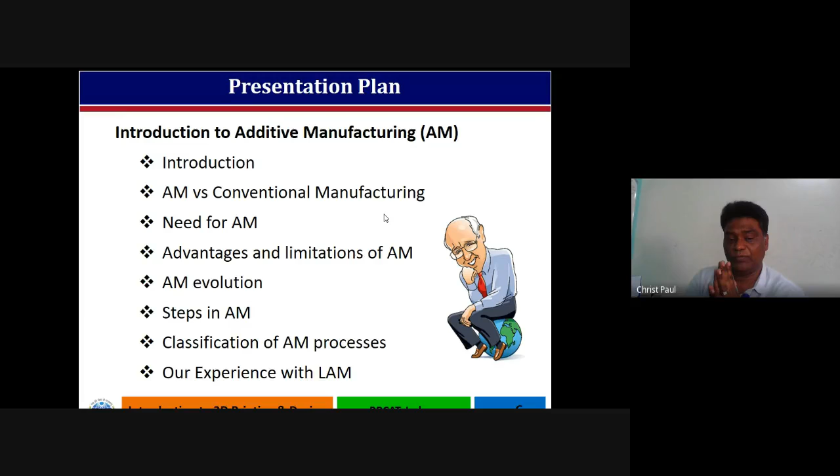So let me come to the presentation plan. We'll start with the introduction. We'll be talking of additive manufacturing and conventional manufacturing comparison. Then why do we need it, what are the advantages and limitations, how AM evolved, what are the steps. We'll talk about the classification, and finally I'll come to our experience in laser additive manufacturing.

Whatever content I'm talking today is part of these 3 books. One is Laser in Manufacturing by Professor J. Paulo Davim. Another is Additive Manufacturing Applications and Innovations, edited by Rupinder Singh and J. Paulo Davim. And the third book we are working on is already in the press, likely to be released in April 2021. Its name is Additive Manufacturing Principles, Technologies and Applications. Whatever the AICTE syllabus is in additive manufacturing, everything will be covered in the textbook that we are writing.

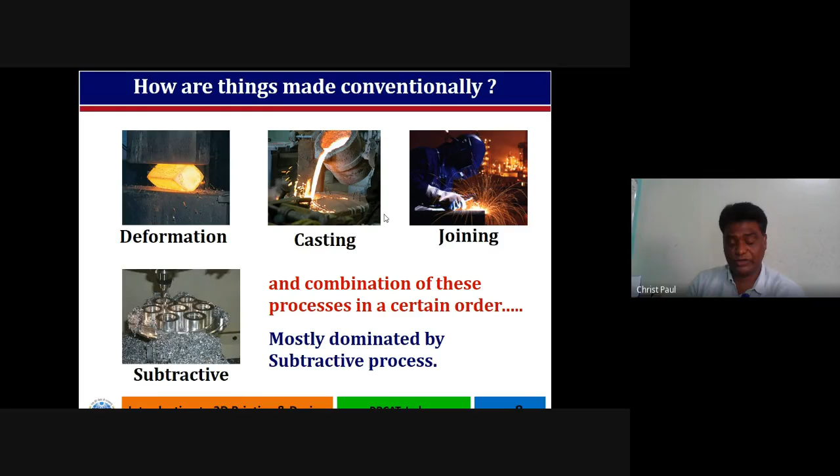So let me start. You all know that conventionally the materials are made by subtractive process. The processes contributing to this are deformation, casting, joining. What happened in 1987? People thought of changing this sign from minus to plus. This change in the sign made a shop floor job into a designer job in an air-conditioned room. This brought a lot of revolutions and changed the very thought of doing the job in the industry.

There is one full-fledged standard called ISO ASTM 52900. This defines the process of joining materials to make parts from 3D model data layer by layer, as opposed to subtractive manufacturing and formative manufacturing technology. If you see this definition, there are 5 criteria that qualify any process to be called additive manufacturing. Number 1, it should be a process of joining of material. You cannot just do a subtractive operation if you are talking of additive manufacturing.

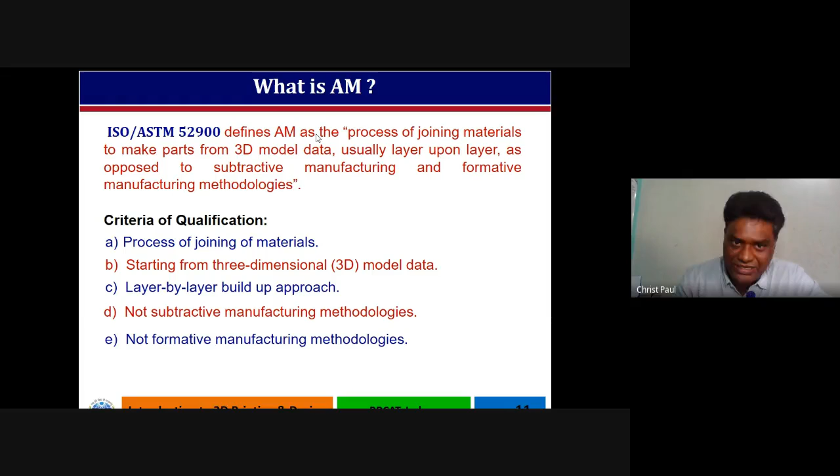Second, it should always start from a 3D model, so that you then build upon it. Third, it should be layer by layer build up. You cannot have something just starting from somewhere and finishing without doing a layer by layer operation. That is also compulsory. Then fourth, it should not be a subtractive methodology, and it should not be a formative methodology. These are the 5 criteria as per this definition.

There are so many processes. In this big chart I have put down which processes qualify and why others don't. N means they are not qualifying all these points, only limited points. Let me explain with one or two examples. Take centrifugal casting. It can make you a pipe of any diameter, and by changing the centrifuge speed you can have variable thickness. But can we have any shape other than cylindrical? No. So this process gets disqualified.

Similarly, if we talk of forging, it is not subtractive, so it's qualifying there, but does it start with the joining of the material? No, forging doesn't do it. Does it start with the 3D model data? No, it doesn't.

Is it a layer by layer process? It doesn't. And is it not a formative process? No. So what is happening, you see, we have to put all the 5 criteria for any process to be called additive manufacturing. And if it is not doing, it may look very close.

For example, now take conventional welding. I'm not talking of 3D welding, I'm talking of conventional welding. So in conventional welding, we are joining the material. Yes, we are joining. Are we starting with the 3D model? No, we are not starting with the 3D model. We are just taking the torch and starting building. Is it layer by layer? No, we are joining two plates.

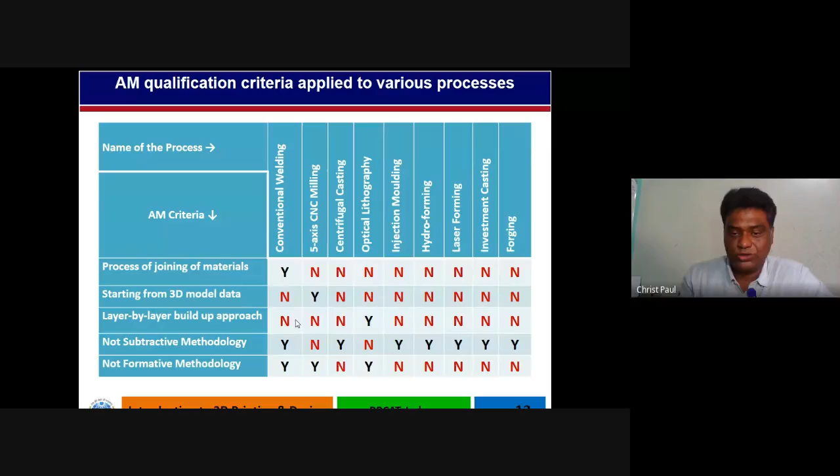So it's not. Is it a subtractive process? It is not a subtractive method. Is it not a formative? Yes, it is not. But again, these 2 criteria, it fails. So these are the points which need to be considered whenever we are talking of any process to be qualified as additive manufacturing.

There are many names to this process. You see, all goes to AM. Maybe 3D printing, rapid prototyping, additive fabrication. So many names. So I'm not going to detail this. In fact, AM is not a new concept. It existed since long. You see, a seed grows into the plant. Similarly, a small infant grows to the adult.

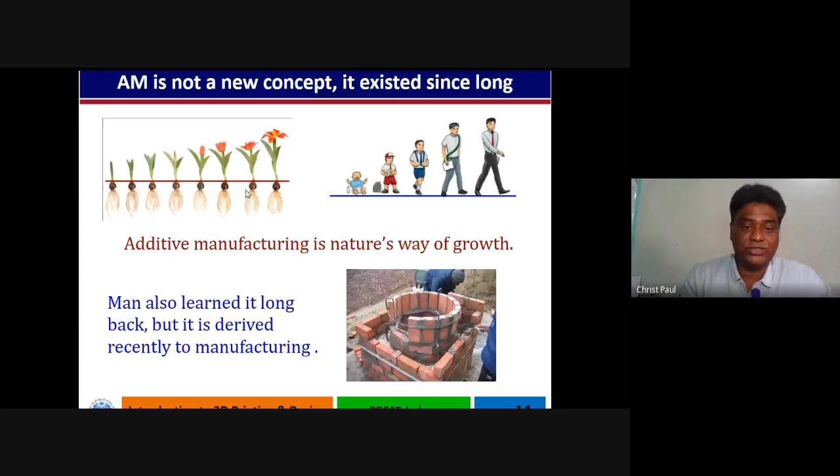In everything you see, they are taking something in. Things are not being removed. It's not like they are a big bulk and then it's cut and given the shape. No, it's additive. So what I want to say is additive is a more natural way of growth. It's nature's way of growth. Similarly, people try to do something in this direction.

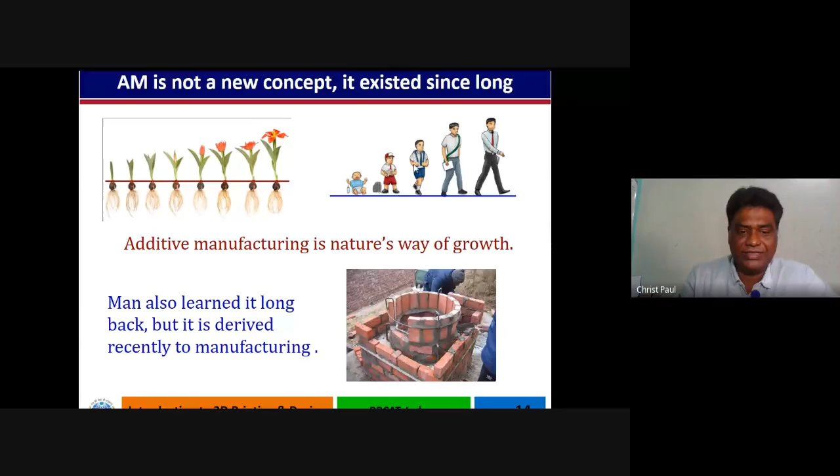If you construct a house, you can take some shapeless things and just keep on growing layer by layer. So it is very close to it, but still it is not additive. Now, the major problem is why people didn't do it earlier: we never had that much resources. We didn't have control on the process to start in this way. Today, as the technology grew up, some of the things have come up and things are changing now.

This is a quick comparison of additive, subtractive, and formative. For example, in terms of dimensional accuracy, additive was low to medium, subtractive very good dimensional accuracy, formative medium. So if you want to have very good precision and dimensional accuracy in your job, then additive is not the solution as of today. If we talk of surface finish, you can see here also it is disadvantageous.

But if you talk of complex geometry, for example, you want to make a very complex geometry, then AM is one of the very good potential solutions. And subtractive has got limitations, because if it is a 3-axis machine, you know the limitation of 3-axis. If it is 5-axis, you can do something, but still there are issues. And formative, definitely a medium sort of scale you can give for it.

In terms of green technology, AM has got reduced material wastage, subtractive has got high material wastage, and formative is there, but not to that level. So this is a quick comparison of these processes under different heads. You can have these ideas and go ahead.

Now, if you talk of the cost per part, in additive manufacturing the cost is not going down as the number of parts grows. So whenever it comes to customization, to limited production, additive is going to be very good, because the cost per part will be less. But when you need thousands and hundreds of thousands, then subtractive and formative are going to lead the way, and that is what is being practiced globally.

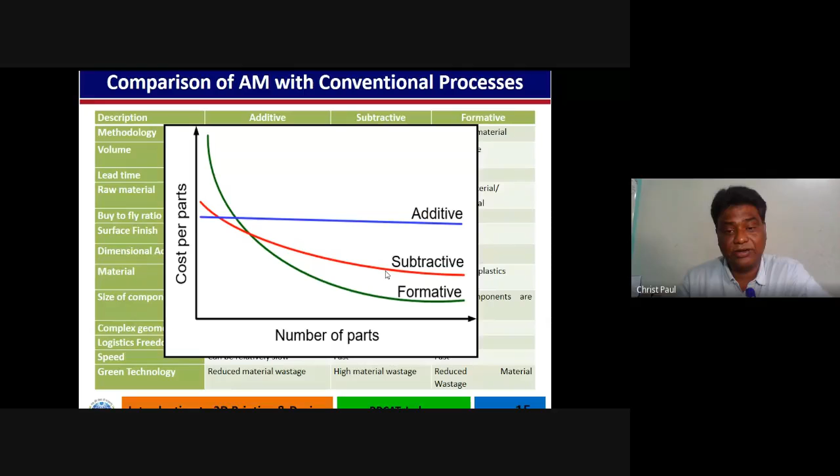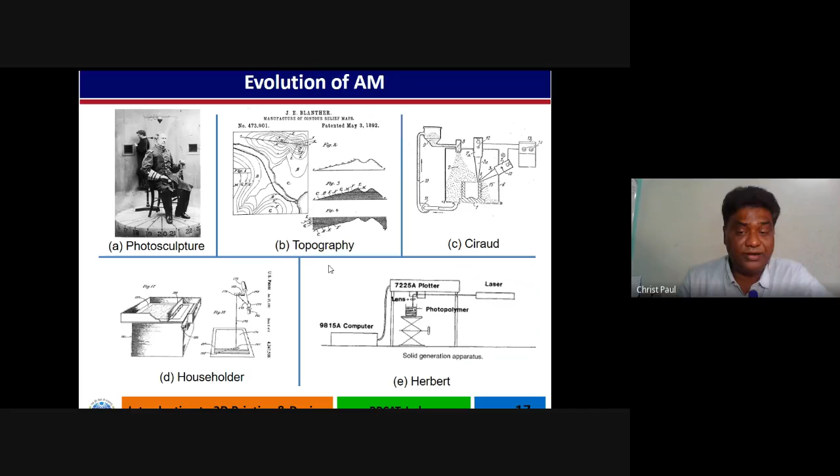So what they did is they did some measurement, and after that they made a layer by layer things so that people know where is the hill, where is the cavity, where is the die, what is the taper and all. So some small scale down model topography they did. So like that, small things were done, and people were trying to make it, but it was never into the scale that it is today, and it was introduced in 1987.

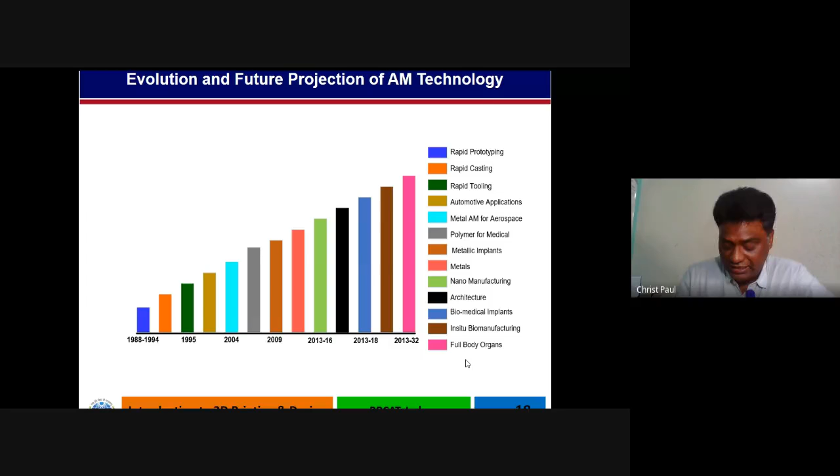After introduction in '87, if you see, it has got really big growth. And what happened is, slowly things started coming up, new technology joined in, and now what is the projection? The projection is by 2032, people are expecting full body organs to be built by additive manufacturing. Means, if your kidney went bad, people are thinking that the kidney can be built using the method and it can be replaced. So we need not hunt for this. That is the expectation people have. Slowly things are growing in that direction.

What is the methodology? So much we talked about. So methodology is like we start with the pre-processing. See what is happening in additive manufacturing. People understand that it is very simple to go ahead with. It's one stage, but it's not so. There are so many points we need to consider to go ahead and work with. For example, if you talk of overall methodology, it has got 3 steps. One is pre-processing. In pre-processing, we talk of concept generation and design. You have some concept. You have to work for this, make it mature, bring it to the level so that it becomes a really good one to work with.

Then we plan how we should orient, because wrong orientation will lead to many other issues. For example, in most of the machines, when we build layer by layer, along the z-axis strength comes out to be lower, while in the x and y plane it comes out very nice. So if you want more strength, you should build your component in such a way that your loading axis is either in x or y or a combination of it, and z should be discouraged. This is just a thumb rule, but there are ways people are trying to fix this problem, this is just something I wanted to share with you.

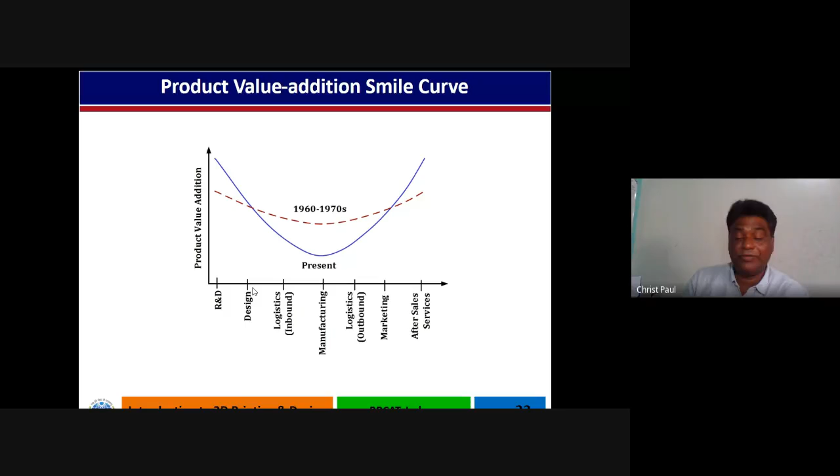Now, what do we have to do as a person working in the manufacturing area? If we just focus on this, tomorrow we may not be important for the organization, and the organization may ask us to leave. What to do? The best thing is if we can take up some of this other side area, so that the relevance of people in manufacturing can be established. So what we have to do, as people working on it and students whom we are teaching, is inculcate these things—that they should not stick to only manufacturing or some supervisory role, but also think of some other domain, so that they become relevant to the organization and can continue.

Now let me come back to the next stage: why additive manufacturing. This is a pretty old slide I have been using for maybe more than 5 years, and it is a fantastic example of how additive manufacturing needs to be understood and worked on.

The first point I always emphasize is that today there is cutthroat competition, because of more players, more models, and reduced volume per product. How is it working? See, if you go back some 25 years, we didn't have many car manufacturers in the Indian market. We had only Fiat and Ambassador, and later joined by Maruti. So we had hardly 2 or 3 players. Suppose they were expecting a volume of 100,000, maybe 1 lakh cars to be sold. So they could always divide the development cost of these cars by 1 lakh, and that would be the cost they put on a car they developed.

But what is happening today? We have so many players. So though the market has increased, if you calculate the volume sold per model today versus earlier, it has reduced. Not only that, earlier there used to be a change in the model maybe after 5 or 7 years. Nowadays, after every 2 or 3 years, they talk of a facelift, including some innovative things. So finally, because of the lesser sale of a particular model, or less volume per product, the development cost has gone up.

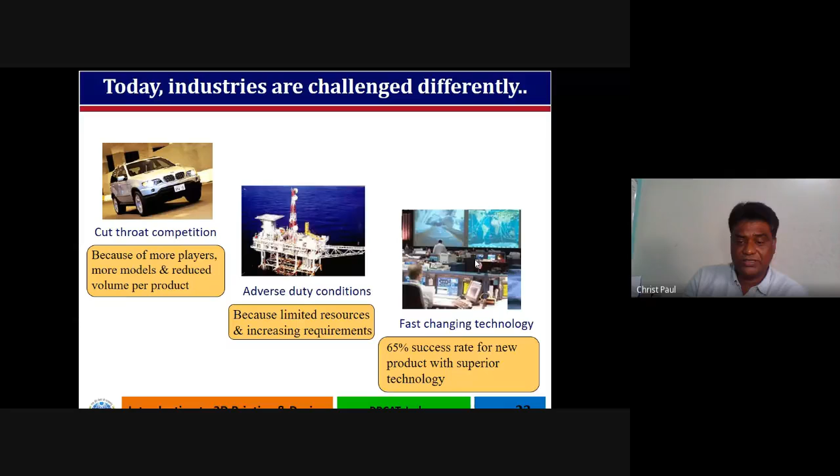What is happening altogether is a fast-changing technology is coming. For example, now people are talking of smart cars, people talk of intelligent systems for engines. So these things are changing all around. This is a matter of concern, and today industries are challenged differently.

If we talk product-wise, earlier the number of variants were less. For example, if we talk of a single car, even in some particular model itself, now we are talking of VX, VXI or LX, LXI, so many particular variants. It is increasing because people are trying to give more and more features at an attractive cost. They're trying to make the balance of it. So more and more variants are coming.

Now the product lifetime is reducing, because what is happening is after 10 years or so there used to be a change of models altogether. But now after every 2 or 3 years, there is a facelift. You have to come up with something new, change the stuff, then only you can sell into the market. So this is going down and down. And in terms of complexity, it is going up, and for delivery, people want it immediately, they cannot wait. So this is the trend in the market.

So people have to work for immediate delivery of the best quality product with maximum possible features at the lowest price. You cannot think of achieving immediate delivery of the best quality product with maximum features at the lowest price easily. So what has to be done?

What can be done is people can work on different methods, try to understand, and in some way, additive manufacturing can help in this.

Take a conventional manufacturing process: we start with the synthesis, we go for the analysis, we go for the documentation and drawing, we do the planning, we procure the raw material, we go for tool procurement and CNC manufacturing, and we go for the quality check, packing, and use. So this is the conventional manufacturing cycle.

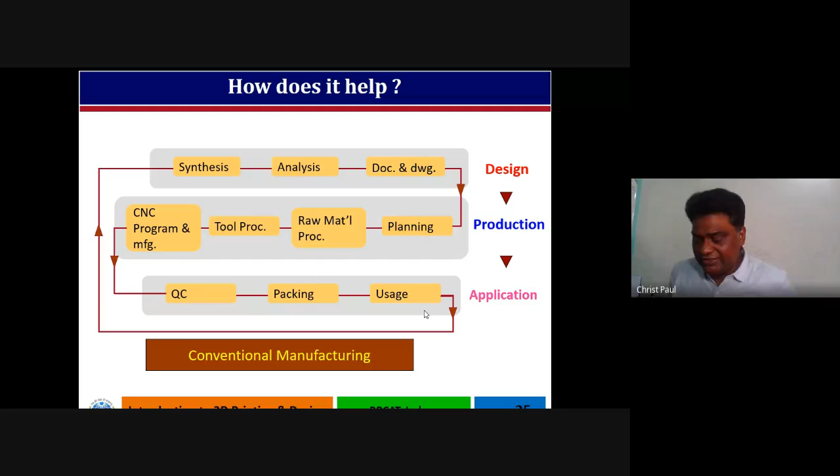Now, if we talk of additive manufacturing, some of these stages are not required to be attained. For example, documentation and drawing. You need not do this, because you have a 3D model, you need not make specific drawings and documentation to do the job. So you need not worry.

In terms of planning, now many of the planning tasks are done with the CNC machines or the software that the 3D printers have. So you need not do a lot of planning. That is reduced. In terms of raw material procurement, I'm talking of the timeline.

You cannot buy right away. What is happening earlier, when we talk of procuring the raw material in the conventional design, is you have to design or define first, then only you can procure the size, procure the stock to fabricate the component.

But what is happening in additive manufacturing, since we are using a shapeless material like wire spools or maybe powders, you can buy in bulk and keep it in stock. The final design of the component is now not needed as much as it is needed in the conventional method. Now, you need not worry too much about tool procurement either. So these are some of the things that are a great gain with additive manufacturing.

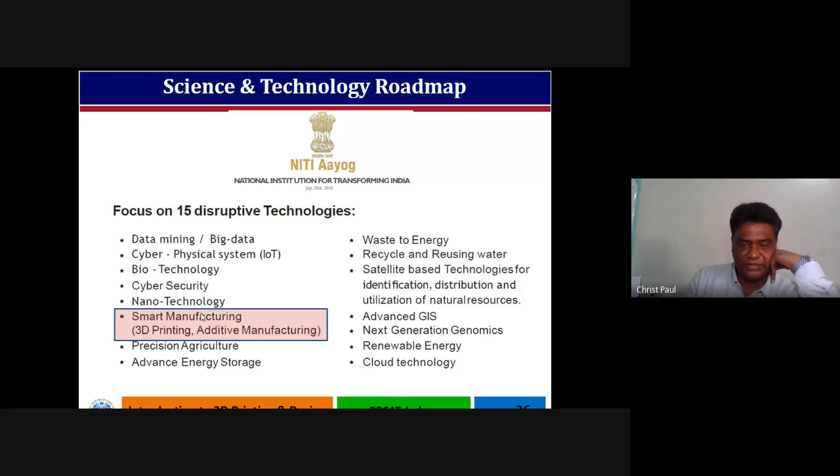If we talk of the Indian perspective, the Government of India is doing a great job, coming up with different ideas, trying to push things to the next level. They have identified different areas for disruptive technology, especially through NITI Aayog. They have identified smart manufacturing as one of the areas, and they are pushing this, generating awareness among people, trying to bring in this new technology and new area.

So now the issue is, what are the advantages, limitations, and sustainability of additive manufacturing? For example, the advantage is complexity for free, you need not worry. What I want to say is, when you convert a 3D product and slice it, the 2D slice is very simple and it's not difficult to make.

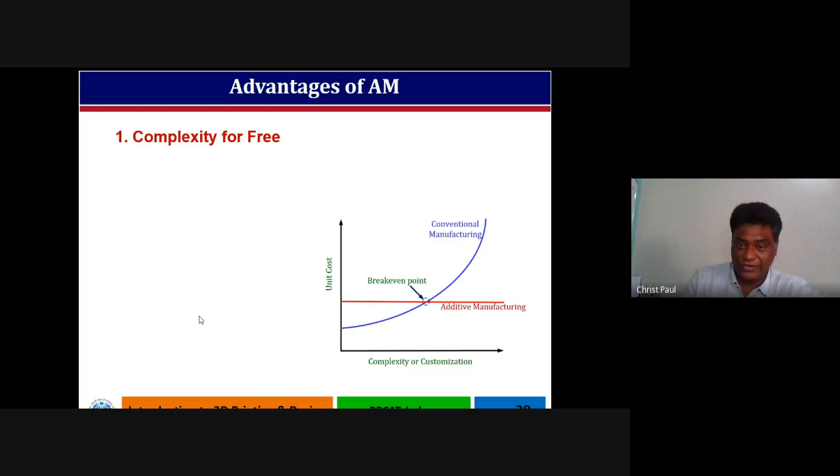But when their slices are put one over another, then it becomes difficult to work on. So what I want to say is, complexity for free is one of the buzzlines people use as an advantage of additive manufacturing. Second part is simplification of part fixturing.

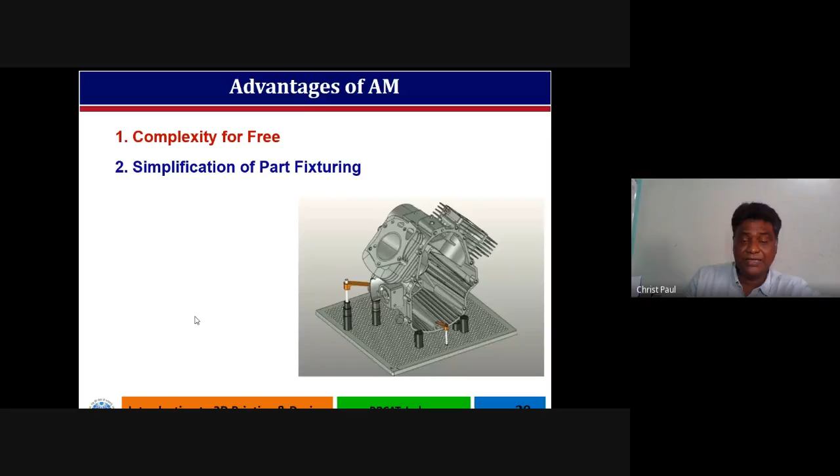Most processes do not have direct contact between the job and the deposition head. As a result, unlike subtractive machining, where there's a cutting process with lots of cutting forces, that is not required in additive manufacturing. Since it's not there, there is simplification of part fixturing.

In terms of mass customization, you can think of doing it. You can customize a product because you're making it one by one. There is opportunity to customize and do things differently.

Another very nice concept we are talking about today is integrated components. This is altogether different, newer stuff. For example, you can think of making a pre-assembled component which was not possible before. We all know that one common mechanical engineering component is the bearing. A bearing has got 4 parts: inner race, outer race, balls or rollers, and cage.

Now the issue is, can you make these 4 parts in a single go? People are trying to develop it. Once this is done, it will be really beautiful, with the whole bearing built in there. People have already tried with plastics, polymers, but they are trying to do it in metals. Still, metal is far from getting it done, but one day it will come.

Moreover, if you want to have a component in which you want to have some electronics embedded, which is possible now, which was not the case earlier.

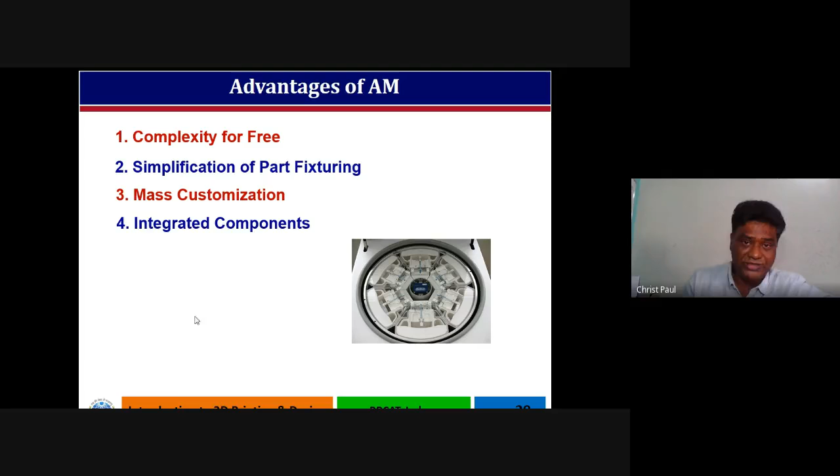There are many examples. One example is in our ISRO program, at the rocket injectors. They wanted to see what is the temperature during the flight. Now what was happening earlier, if they put some sensors, these sensors would take some space and it was very difficult to make them in, and it was also putting some retarding action over there to the work. So what they thought was, can this component be integrated into the rocket nozzle itself? Some of these things were tried and they did it, and it's really a great job with very good understanding about it. So this is the thing which is happening.

Another advantage of additive manufacturing is material design freedom. When I talk of material design freedom, it means you use the material when and where it is needed. For example, if you want to have a highly conductive material, it's better to have a copper-like material.

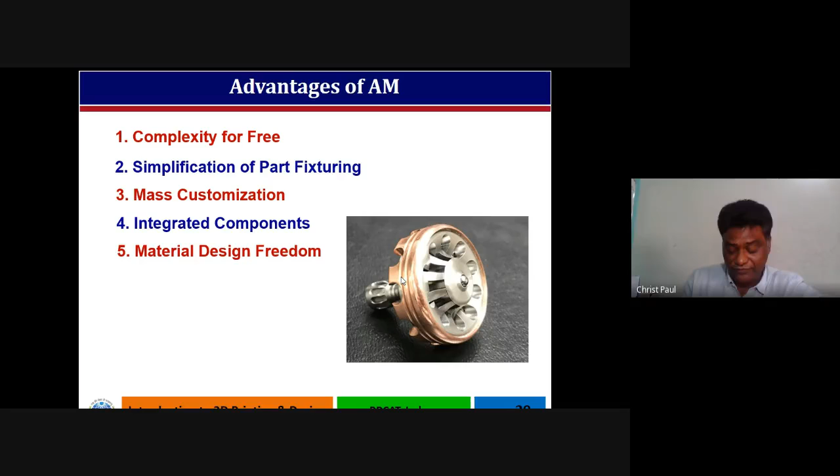In this pandemic, when we talk of antibacterial or antiviral properties, copper and silver are the best. But copper and silver coating everywhere is difficult in different shapes. One way can be to use these materials in the right way with different coatings, and deposit it locally where it is more in contact. So that sort of thing is possible. That is the material design freedom you have. You can have different materials at different locations. That's the way things can be planned.

The sixth is logistic freedom. In logistic freedom, what we do is we can design here, or take the advice of anybody across the globe, and think of getting it fabricated at some other location, because simple file transfer is taking place, which can be done in few hours, even with very slow line connections for uploading and downloading. So that is there, and logistic freedom is working on.

Reduce wastage. You can think of making a very nice arrangement, and you can plan the project so that the wastage is least.

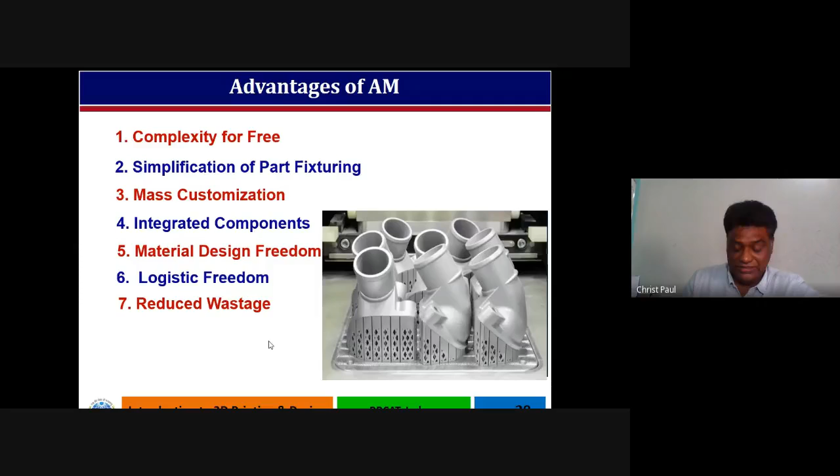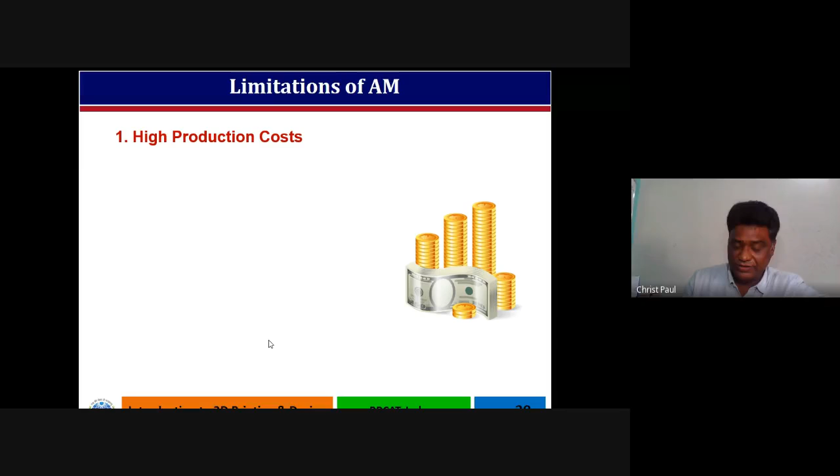With so many good things, what are the limitations of additive manufacturing? One limitation is its costs are high as of today. With time, many new processes will come, new entrepreneurs will come, and we are expecting this price to go down.

Mechanical properties, especially in metals and ceramics, are an issue now. People are working on it, how to fix it, but it will take some time and things will be improved. Still, there is a need for post-processing, like removing the support structures or some finishing operations. It can be resolved later.

Build volume. So build volume is another issue that we have to work on. Today it is a limitation. The size of the machines are maybe 300 by 300, 500 by 500. So people are thinking, can this be increased to make it large? This is one of the limitations.

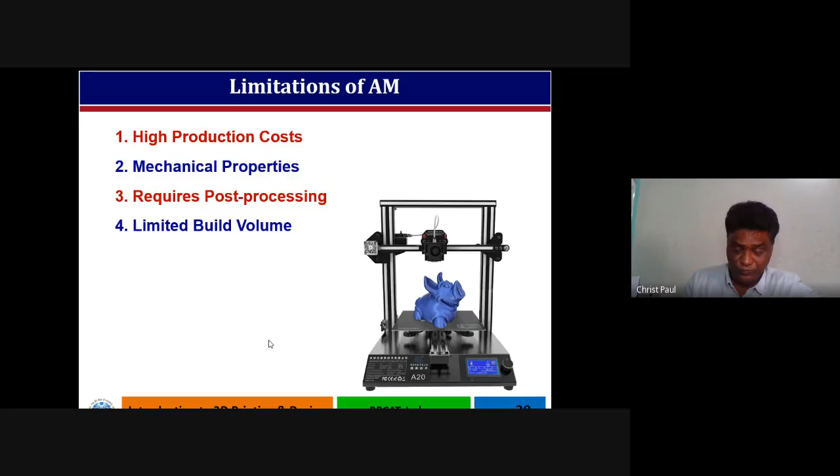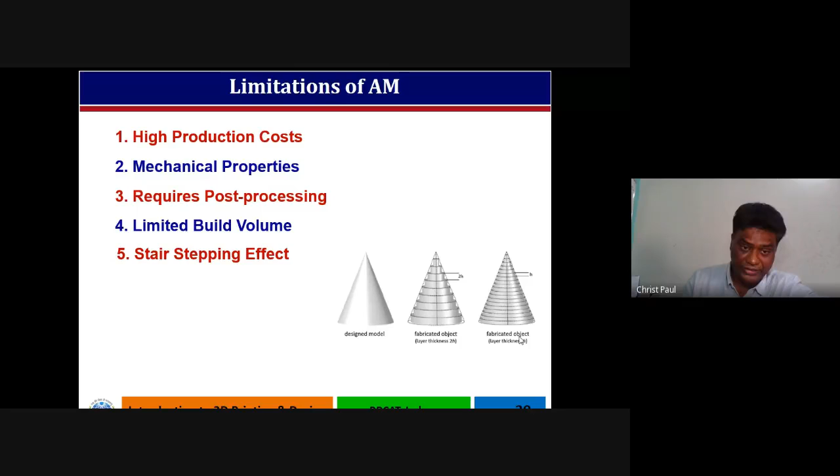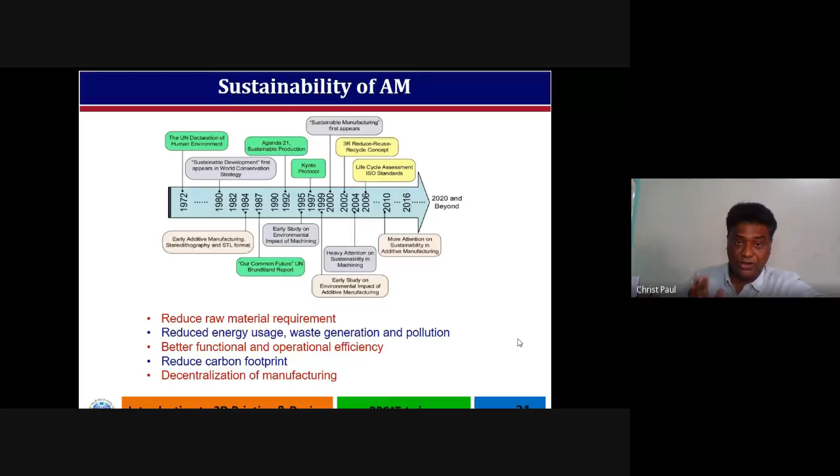After that, the question is: is additive manufacturing sustainable? This is a big question. The sustainability issue started somewhere in 1972. People started working on this. If I see in terms of additive manufacturing, it says that the raw materials are reduced, the requirement is reduced, energy, waste generation, and pollution is less because you're using a limited material. Functionality and operation efficiency is increasing, and overall carbon footprint is reduced. Moreover, it also allows a decentralization of manufacturing, which ultimately allows sustainability. So these are the parameters which are pushing additive manufacturing towards sustainability.

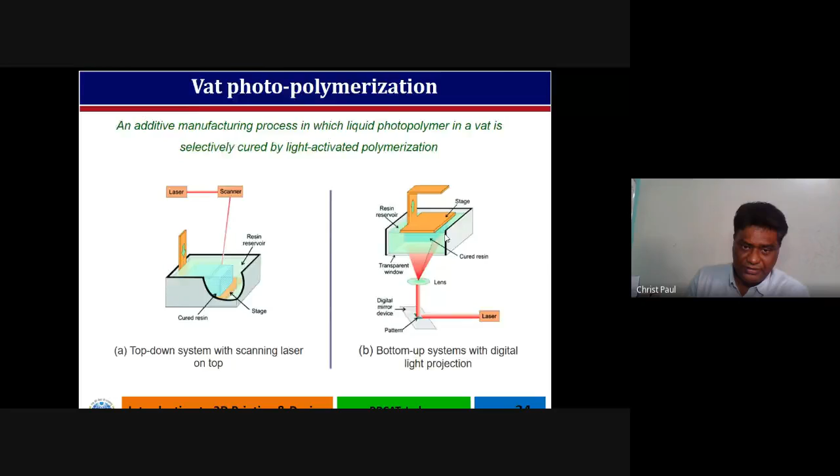Now, the advantage of this is it is simple and compact. Quality and accuracy is good. Multi-material capability is possible. For example, you can go up to layer N with material 1, and after layer N, you can change the resin and start another. So multi-material capability is possible. It is mostly used for prototyping.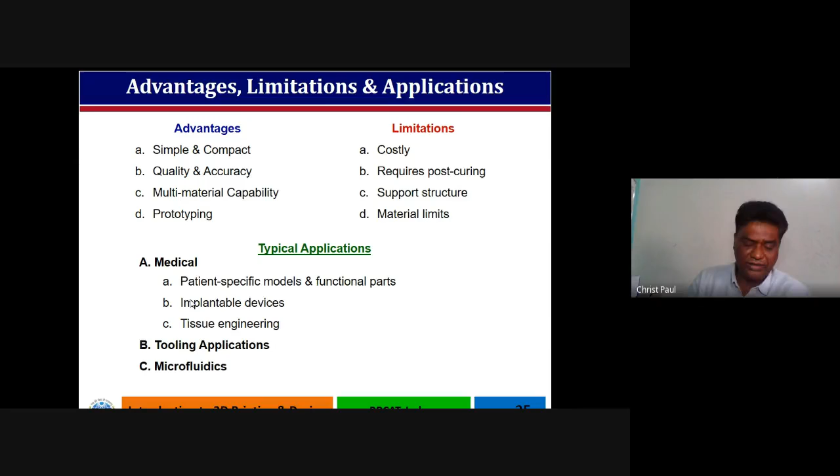In terms of limitations, it's a costly process. It requires post curing. It requires support structures, and materials are limited. These are commonly used for patient-specific models and functional parts, implantable devices, and tissue engineering. In some cases, people are trying to use it for tooling applications and microfluidics.

Another method is material jetting. As the name suggests, there would be a jet, and this jet will be falling on the component, giving shape to it. In this, 2 approaches are used: one is continuous jetting, another is drop on demand. What is happening in continuous jetting? There would be ink filled in, and you are pushing it, and it is falling continuously down. This is the surface where you want to print. There is a field, and this field's plates pull this and allow the falling drops.

And when this field plate doesn't push this, then this directly falls into the catcher, and that's the way continuous jetting happens in the material jetting process. Another approach people use is drop on demand. What is happening is the ink reservoir is there, and whenever the head goes to the location and sees that there is to be deposition, it drops a defined volume of the drop. So that is the defined volume of the ink in the form of a drop. So continuous and drop on demand, these are the two processes which are used.

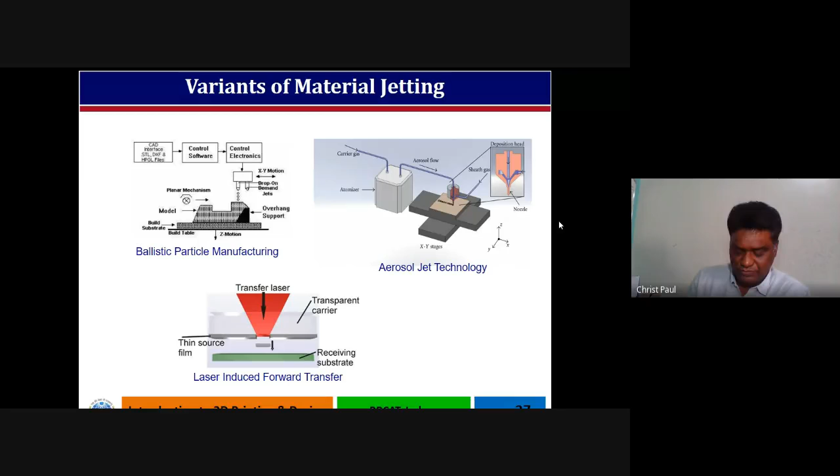So in this whole process, what is happening? There would be a building platform, there would be build material, it will be falling on it and getting solidified. This way, the thing goes on building in the material jetting process. There are many variants. I already discussed ballistic particle manufacturing, aerosol jet technology, or laser induced forward transfer. These are some of the variants of material jetting.

The advantage is its accuracy and finish are good. Full color and multi-material are possible. Removable support material can be done. In this particular case, since you are using a jet, people have come up with the idea that they can use water soluble or acid soluble support structures. So you put the component into this, and all the support structure goes. So it's very simple to remove it and work on it. That's one of the advantages.

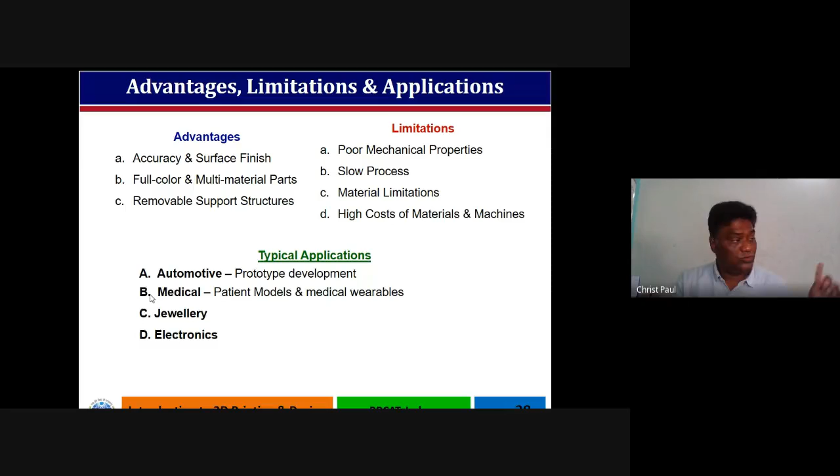In terms of limitations, the mechanical properties are poor. The process is very slow. Materials are limited because you should be able to give the shape to the material, you should be able to pull it with the charge. So there are limitations. And these are specifically used in automotive, medical, jewelry, and electronics.

One of the very common ones is material extrusion. We all know about FDM. I will not go into very much detail on this. These are very common. Today, if you go to the FDM market, the printers are available from maybe 15,000 to a few lakhs. Now, as an entrepreneur or an institute which wants to work on it, it's very simple to do it with your own machines, maybe 15,000 or 16,000 or 20,000 to start with.

But the reality is these machines have got some interesting problems. For some components, a few of these things, they work well. But if you really want an engineering component, a better design, then you have to go for a more precise machine with the right parts and material.

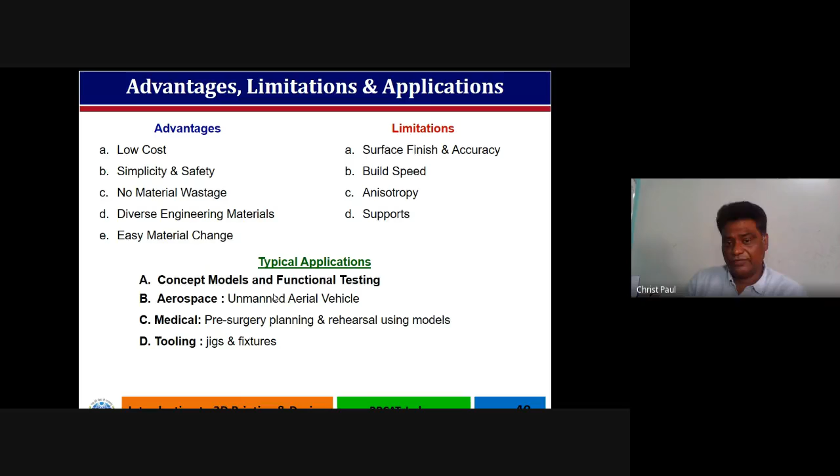The advantage of this process is its low cost, simplicity, and safety. Material wastage is not there. Many materials are available in the market. Material change is easy. Just pull out the filament and it can be changed. The limitations of material extrusion are surface finish and accuracy, build speed, anisotropy, and support materials. Typical applications are concept models and functional testing, aerospace, medical, and tooling. So these are the applications people are working on.

Another concept is binder jetting. This is one of the things which is now more popular. HP has recently come up with a machine for metals, and people are using and buying it, and it's a hotcake in the market. In this process, the material is laid by the leveling roller, and there would be, I'm using the word, an inkjet print head. This will be feeding binder material. This binder will be falling drop by drop and the material gets bonded together. So that is the concept.

You must know HP was good in printing technology. They made very nice color printers, laser printers, even desktop printers. So they have employed similar technology here. What is happening is the binder is put onto a metal or ceramic layer, and this binder is joining the ceramic and the metals. As a result, the component gets solidified. So this has come up very nicely, one of the hot cakes in the market.

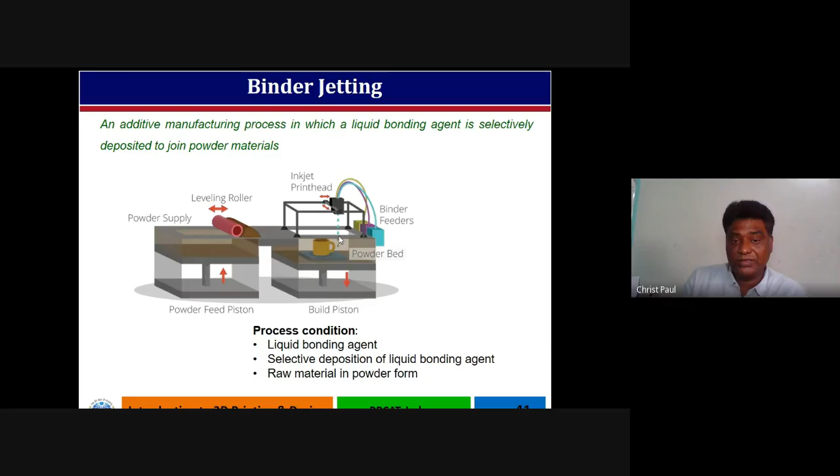This doesn't need support structure. Warping is not there because there's no heating. Colored parts can be made. You can use different ceramics, different inks to do that. Build rate is high because you can use multiple heads and do the job. You can have 10 nozzles or 20 nozzles working together and doing the job. So it is possible here.

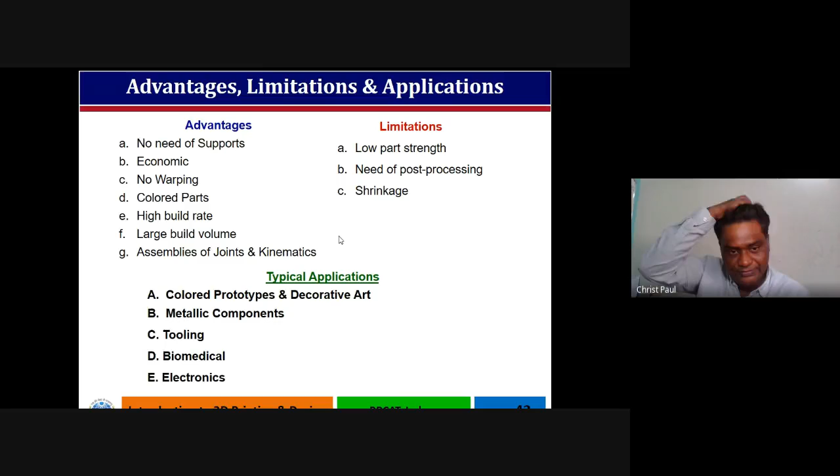Build volume is not a limitation. You can have just a structure, mount other things on it, and work on it. And since distortion is less, build rate is high, warping is not there, support structure is not there, this is now very good for pre-assembled components. So that is the thing which is being seen as an advantage.

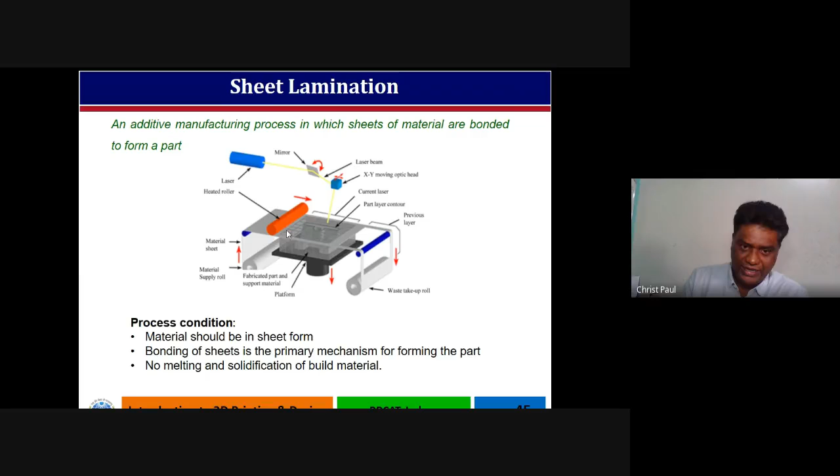So the other process is sheet lamination. In sheet lamination, LOM was one of the things which was very popular, laminated object manufacturing. In this, what is happening? We'll be pulling a layer of the sheet. This should be stuck, and then it will be cut and given the shape. So this is the process, very simple.

The advantage is there is no thermal stress. Integrated components can be made. Color parts and graded material properties are possible. Separate support structures are not required. Cost is low. The disadvantage is the resolution is low.

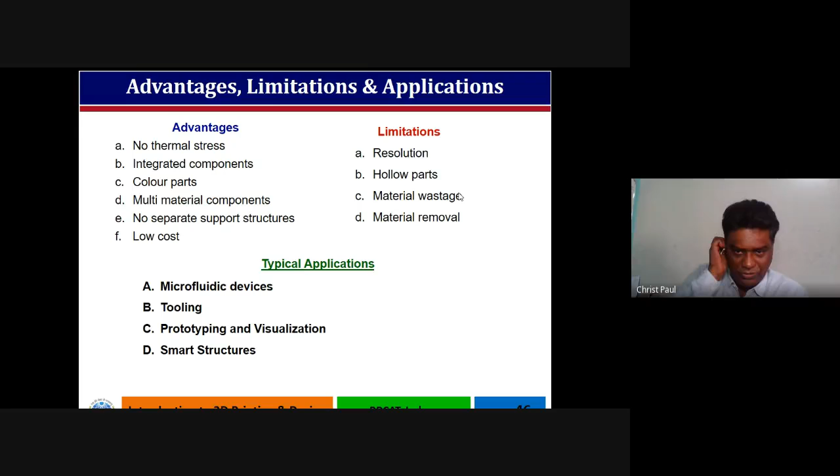Hollow parts cannot be made. Material wastage is there because you are taking a sheet and cutting it. It involves a sort of material removal, so that is again a problem over there. But this is very good for microfluidic devices, tooling, prototyping, visualization, and smart structures because heating is not there. So this is the thing.

The sixth process is powder bed fusion. So in powder bed fusion, what is happening? We have a powder, and this powder is leveled and spread, and with the help of the laser this is melted and deposited. This is the process. Either laser or electron beam can be used, but finally metal is melted. So this is one of the things which is more popular in the country.

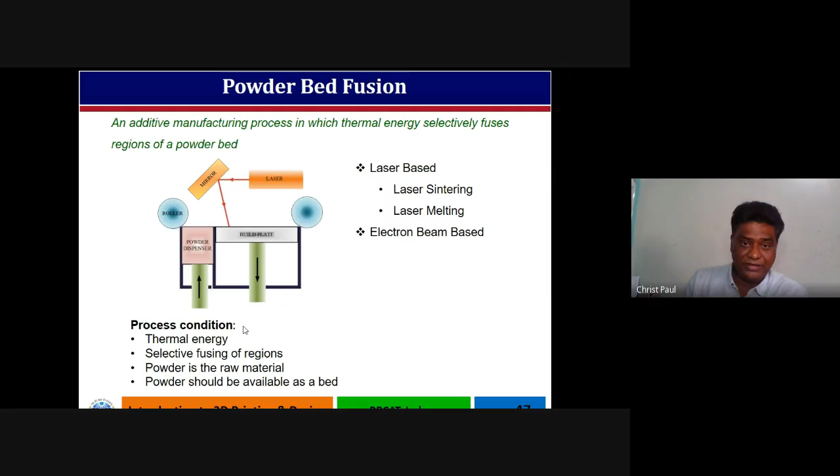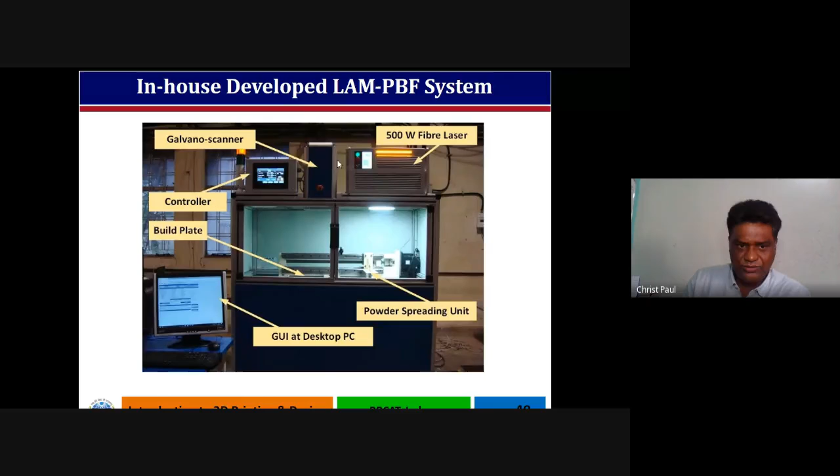There are many manufacturers, for example, SLM, EOS, Renishaw. They are sending powder bed machines here. This is the machine that we built at RRCAT. This is a laser additive manufacturing machine based on powder bed fusion. It uses a 500-watt laser, a galvo scanner, then a build plate. It spreads the powder and deposits in shapes, and we have made many shapes.

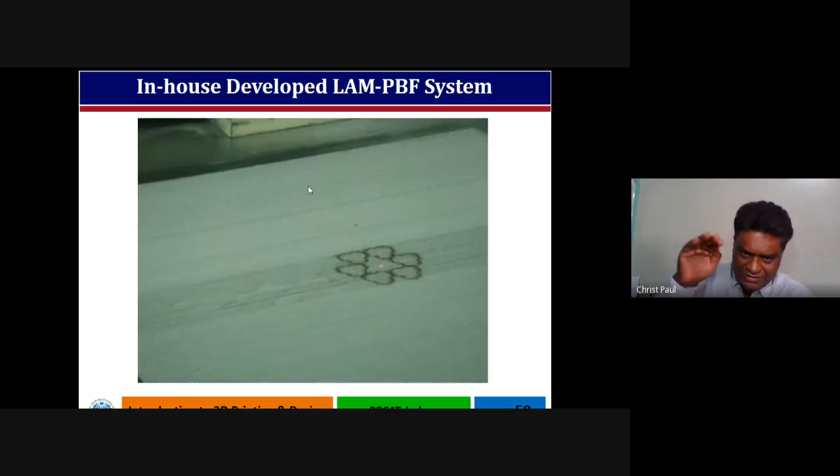You can see how the machine works. You see the powder layer is spread. Now the laser will be falling on it, melting and depositing. Then we are laying another layer. So what happens is, after deposition, this build plate goes down by a predefined height. After that, we deposit. So that is the way it works.

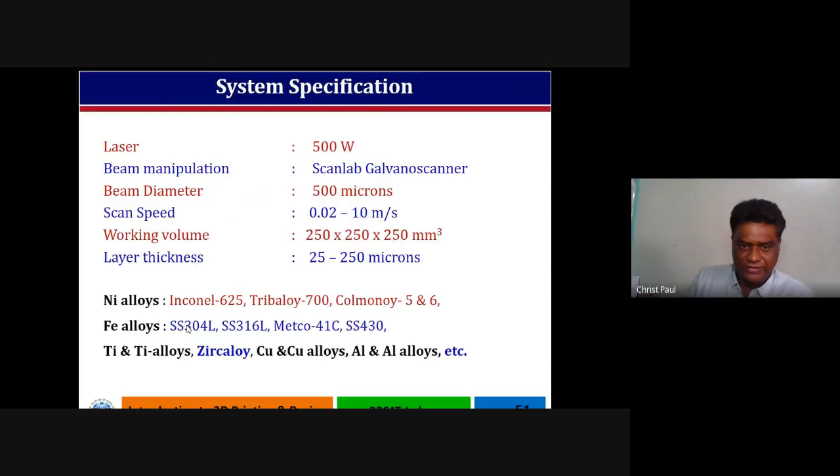The present capacity of this machine is 250 by 250 by 250 millimeter. And we can work from 0.02 to 10 meters per second. We have worked with many metals. Now, this is very good. It can work with various shape complexities. Thin features can be given. Mechanical strength is pretty good. Dimensional accuracy and surface finish are possible. Powder can be reused. But the limitation is limited material capability.

Just a few days back, I was going through the literature. I found that people are trying to develop multi-material capability in powder bed fusion, but they are still working on it. It will take some time to come to that level. Another limitation is porosity, because people say that in powder bed fusion, you cannot achieve more than 98.5% density. So you have to go for some post-processing like HIPing.

Build rate is slow, volume is limited, but this is convincingly used in aerospace, tooling, medical, and automotive applications. The seventh process is directed energy deposition. In the last process, we were spreading the powder and then sending the laser beam and melting it. Another approach is you can send the powder in the form of a stream through a nozzle, feed and in situ melt the material. So this is called directed energy deposition.

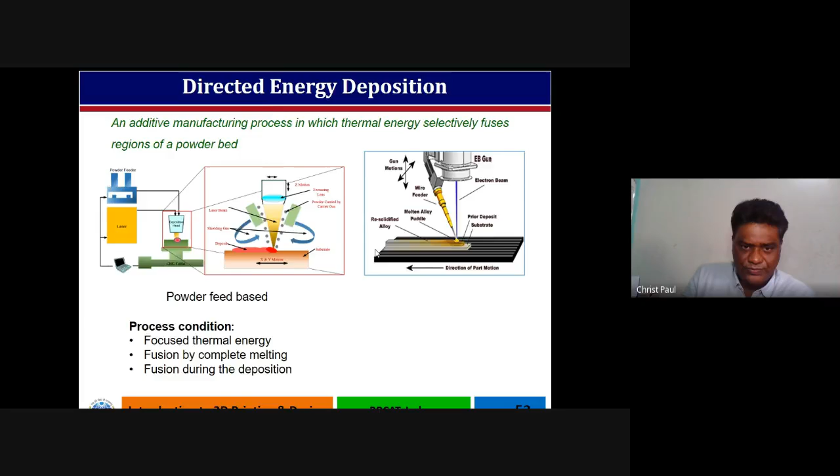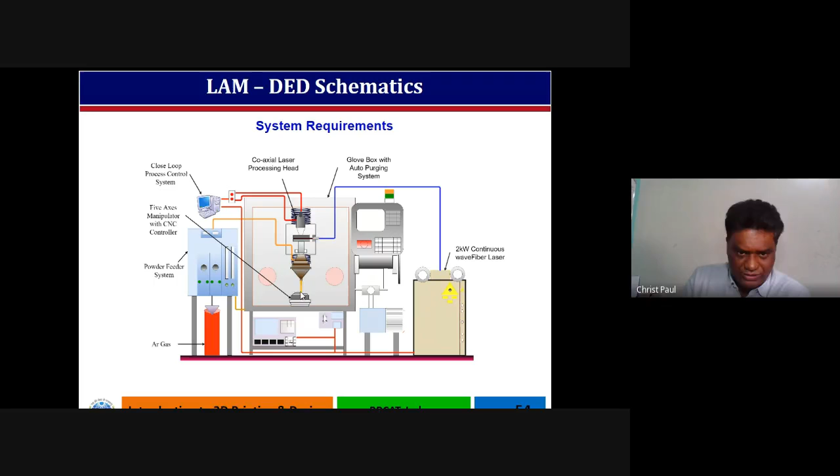In this system, you can think of a laser beam coming here, and then you can have a powder feeding mechanism, so the powder will also be coming here. Both will be coming coaxially, and as a result, the laser will melt the metal powders and they will get deposited. For example, you can have a coaxial nozzle. The laser beam will be from the center, and there will be three streams falling here. When these join together, the powders are coming, the laser beam is coming, it melts and deposits.

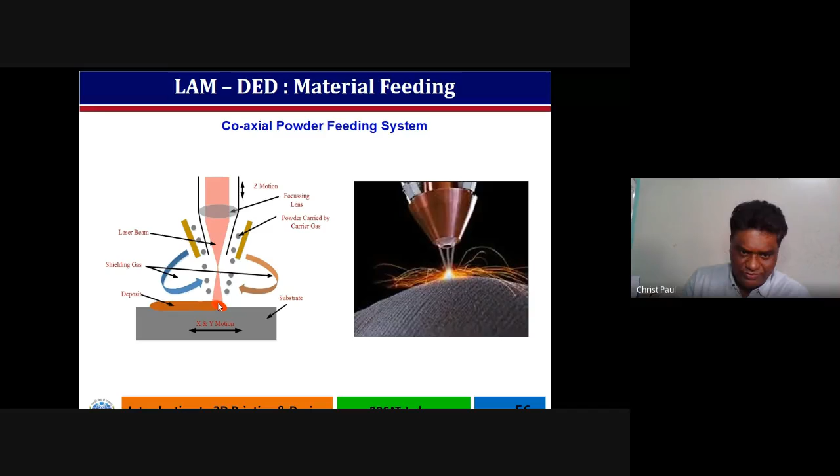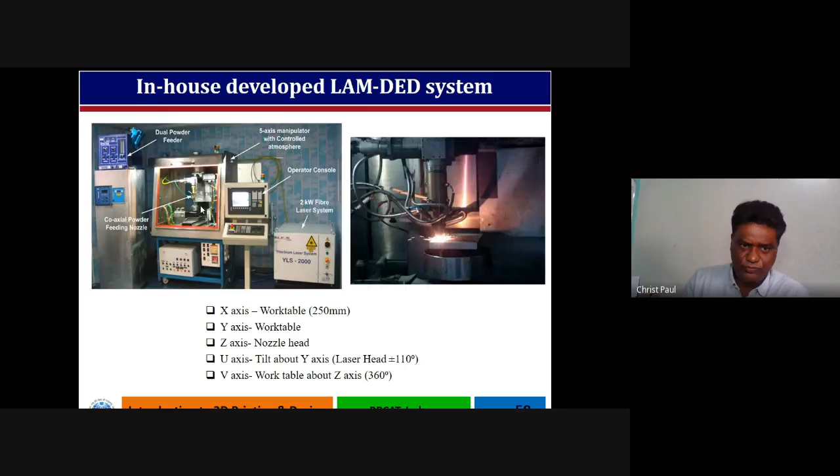In this particular machine, the volume is 250 by 250 by 250, but this cannot be used for realizing larger volumes. So we made another machine. Its volume is 1.6 meter diameter and 1.4 meter length. So this is the component size which can be made in it. It has a robo head mounted over it. You can give the shape to the component.

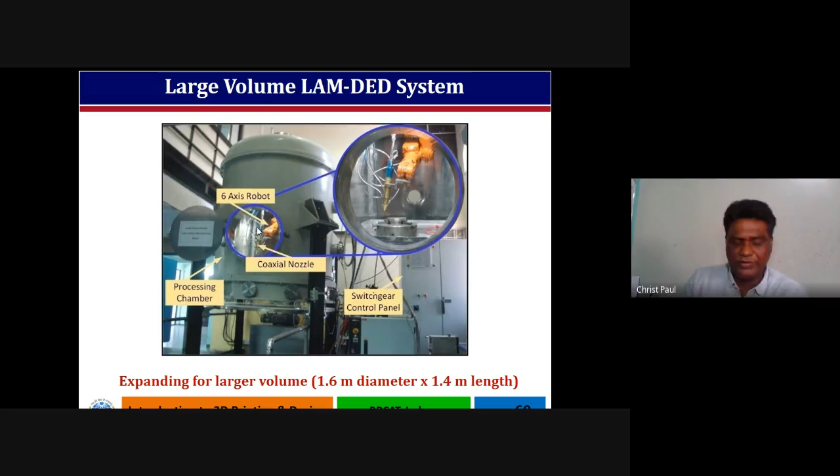The advantages of directed energy deposition are a good deposition rate, dense and strong multi-material parts are possible, larger parts can be made, and easy material change is possible. The limitation is dimensional accuracy; compared to powder bed fusion, it's less. Support structure is the issue here. We are able to work on it as designers to resolve the support structure issues. Since high energy is involved, there is distortion. Typical applications are near-net shaping of parts, tooling, biomedical, cladding of high performance material, and repair.

So after giving you such an introduction, now I'll be focusing on our experience with laser additive manufacturing, what things we did in the past, and how laser additive manufacturing brought a change in the workflow in our system. One of the very first examples is making a Colmonoy bush. This is the first assignment we took up, maybe some 6 years back. These are bushes made of Colmonoy. These are part of the fast breeder reactor, and they are used in control rod drive mechanisms and control rod mechanisms.

The idea is that there would be a shaft going through these bushes, and your control rod will be hanging on the shaft. That is the way it is done in the reactor. Now, since the reactor is at high temperature and in vacuum, with time, ordinary material gets welded with the shaft. Since it is part of the control rod, you don't want this to happen, because the moment you want to control the reactor and push the control rod down, if it doesn't go down, you can understand what will happen.

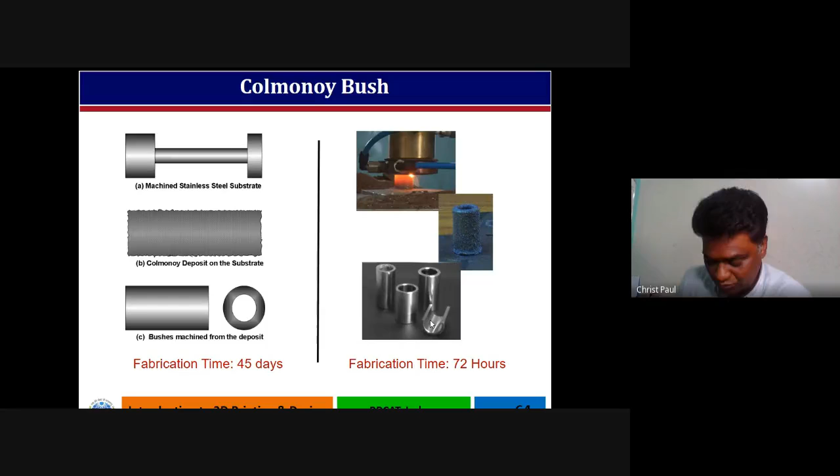Another point is we tried to make low-cost tools. When we talk of large diameter tools, we use cemented carbide or sintered carbide tips. But in small diameter tools, we are not able to do it, because how do you mount and tie these inserts into the tool? So this is one of the limitations. But for a small diameter tool, you can always deposit tungsten carbide using additive manufacturing and then sharpen it.

This will definitely result in a very low cost tool, because you are not using tungsten carbide to build the shank. You all know that in the cutting process, the shank is not contributing. The contribution comes only from the cutting edges. So that sort of thing is possible, and we tried to build it, and we found the performance of these tools is 80% of the sintered tool.

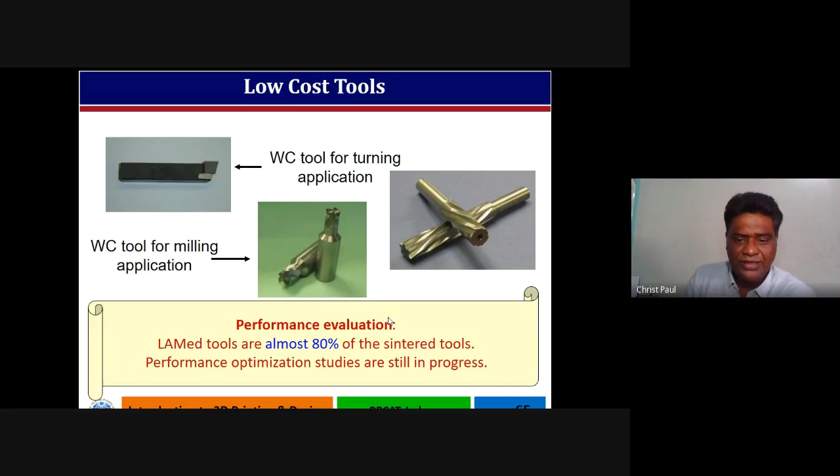And what is happening, such a small change in the fabrication methodology and the design yields a change in the cycle times in the order of 20%, 15%, like that. So when you have to make thousands of components using some dies, then it makes a very big difference.

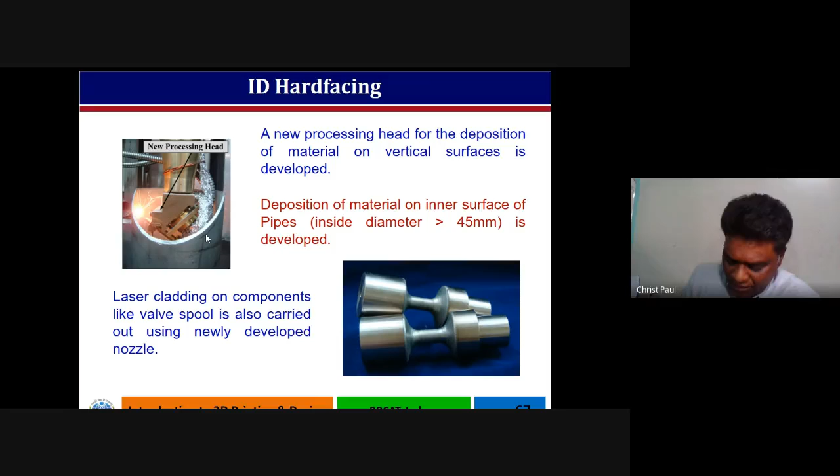Another application we try to do is hard facing, where we use some hard superior quality material, and we develop the nozzles and deposit the material. This is very good when you talk of making some elbows and bends. You want a very high hardness material over there.

Another application we worked on is development of a stainless steel titanium graded transition joint. See, titanium and stainless steel are used in fuel reprocessing plants. When you have fuel burnt in the reactor, then we have to reprocess it so that whatever leftover fuel can be recovered, and then it can go for further processing and reusing.

Since in this process people use boiling nitric acid, especially for the fast reactor spent fuels, they want the reactor shell to be made up of titanium. I'm talking of the reprocessing reactor shell. So the reprocessing reactor shells are made up of titanium because there is boiling nitric acid there.

But there are lines connecting the titanium reactor shell. These are normally made up of stainless steel, because getting everything made up of titanium is very costly, since we may be using them only once or twice for charging the reactor shell. So titanium is normally not used there. So people are using stainless steel tubes and joining them with the titanium shell,

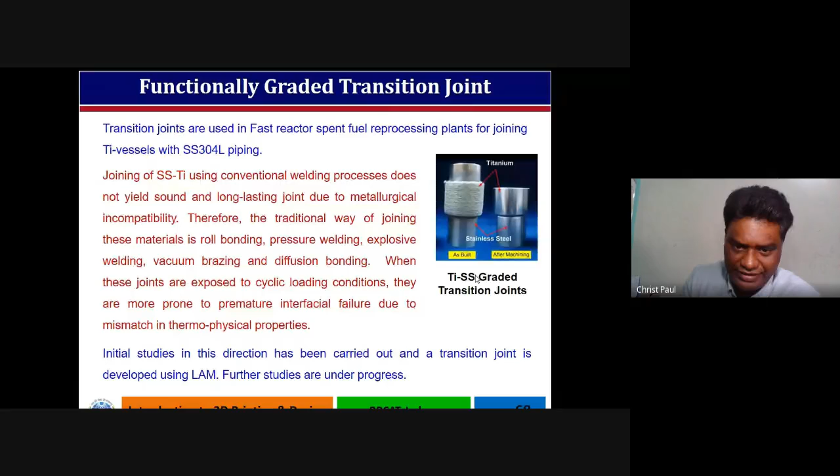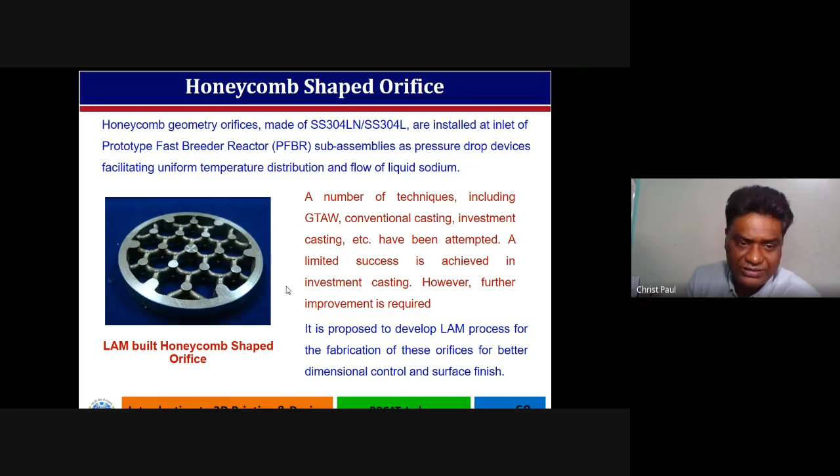Another application that we work on is honeycomb shaped orifices. These are again part of the reactor components. This is very simple to see, but difficult to make because you have so many studs, ribs, overhang structures. The size is about 75 millimeter diameter, about 3 inches, and the thickness is about ½ inch. So making this is a really tedious task. Finally, we tried additive manufacturing, and we have sent it for testing in the prototype fast breeder reactors. So these are the things we are doing.

Another concept: we are working with Bhabha Atomic Research Centre in development of printed circuit heat exchangers. In this, very fine things are made, especially for next generation nuclear reactors or supercritical CO2 gas based Brayton cycles. In these advanced reactors and CO2 Brayton cycles, the cooling circuit tubes in the heat exchangers are coming out very small. The size can be as small as 2 or 3 millimeter, and making them is very difficult. So we tried to make a prototype.

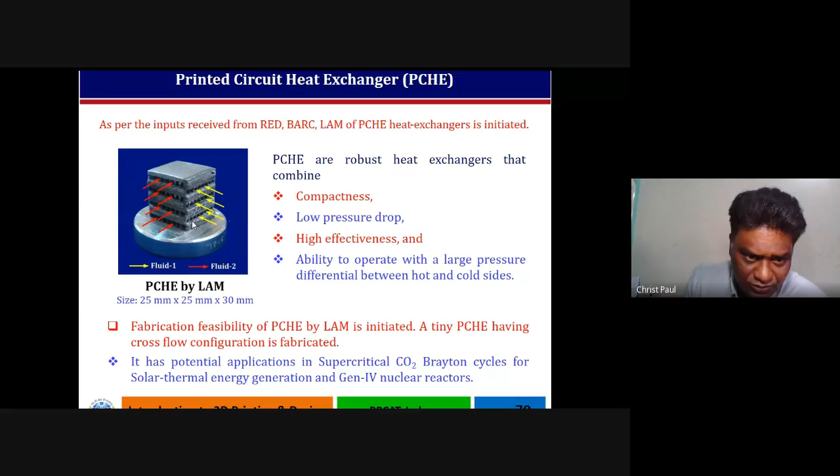You can see this is a 1.5 millimeter by 1.5 millimeter square shape, and this is another. That sort of thing we made at 25 by 25. We are now building the real one, 200 by 200 by 200 size. So this will also be tried and readily available very soon.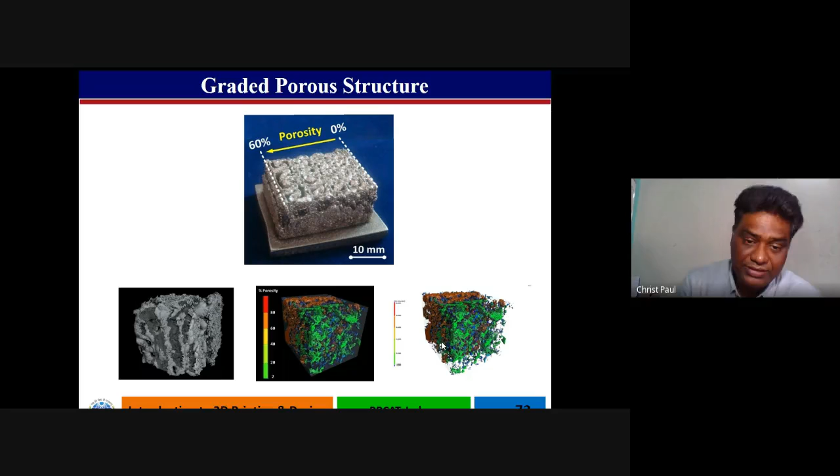You see the microscopy images - brown where the porosity is less, and green where the porosity is more. So that sort of thing is possible. You can design the component, make the component as is, and the shape of the porosity can be controlled. If we can estimate these things correctly and make it predictable, then these can be deployed in a much better way in all engineering applications.

We have built many shapes and components - you can see we made a prototype hip implant, impellers, porous structures, and a honeycomb gear. Just think of it - a gear of this size, around 150 millimeter diameter with 40 millimeter ID, with a honeycomb core. How much time do you think it would take to build?

The thickness is about 40 millimeters. How much time do you think it can be built in? I can share with you - the time we took to build it was about 4 hours. You cannot build this gear using any conventional manufacturing technology in 4 hours. Yes, you could do forging or some other method with a die, but if you talk of total process time, it will be much larger than that. So this is possible - we did it.

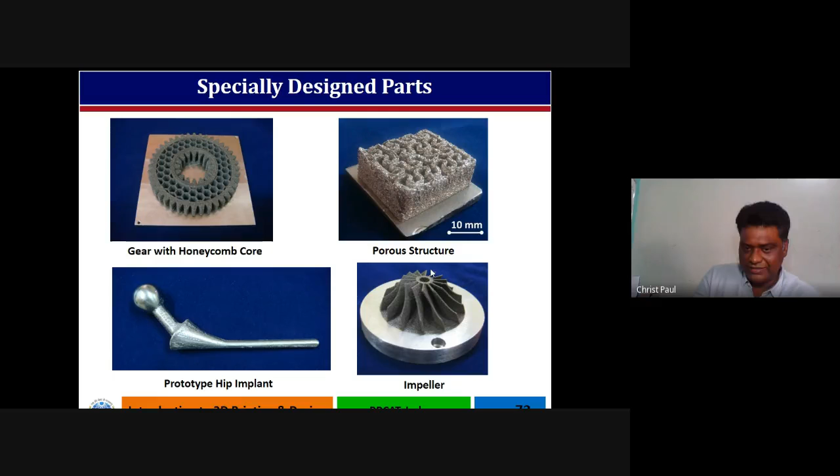If you look at this impeller, you see such a nice profile has come out - this is again built by additive manufacturing. So what I want to say here is that additive manufacturing is the joining of material to make a part directly from a 3D model, following the layer by layer approach that we have already discussed.

The advantage of additive manufacturing is not to replace conventional manufacturing processes, but it is going to coexist with other existing manufacturing processes, where we can have techno-economic advantages depending on how and where each process is applied, so things can be done in a better way. You know that ISO 52900 has classified additive manufacturing into 7 categories, and all these processes have distinct advantages and disadvantages, which I already shared with you from our experience.

And with this, I close. The session is now open for questions and answers.

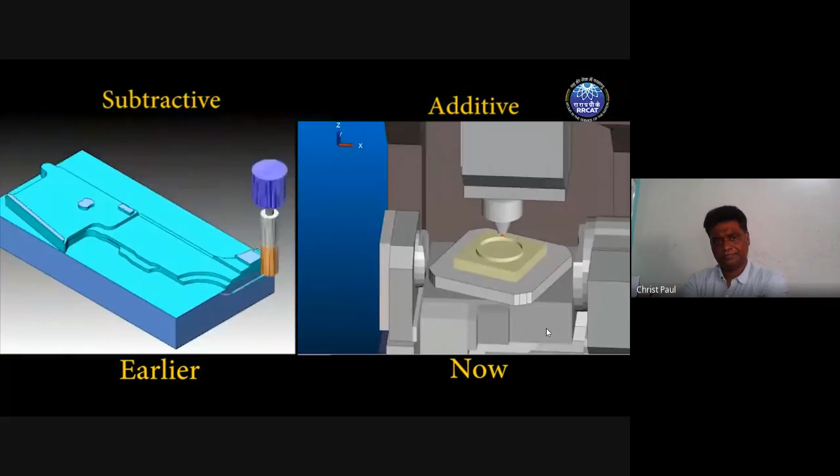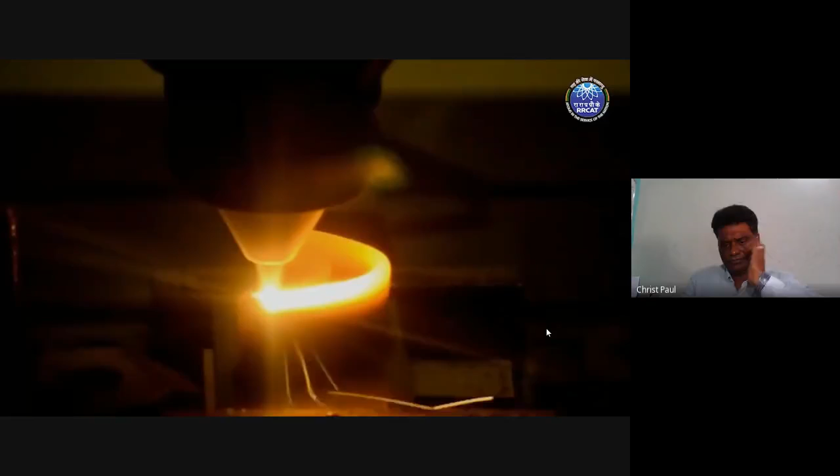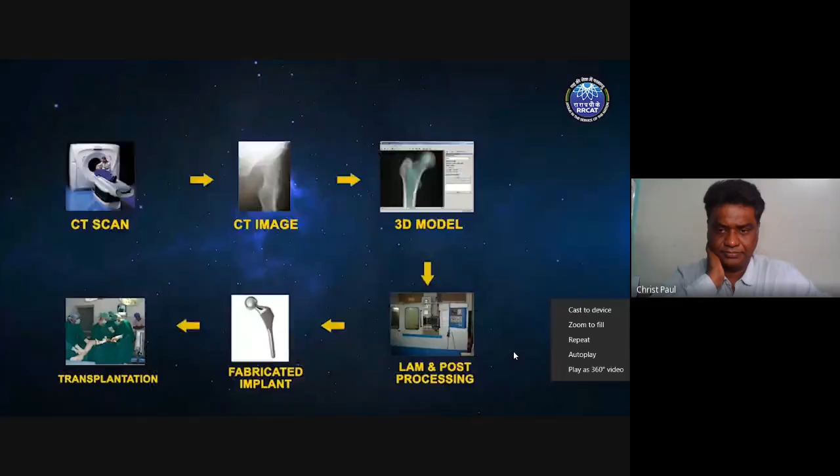Hello, yes. Sir, some participants are asking questions. Can I take them? Yes, please. Sir, here one participant, that is Madish Kumar.

Whether heart implementation is possible through 3D printing? I heard the research is going on. That is true, there is a lot of research, especially in tissue engineering, and a lot of things are being done. Today, making of a heart by additive manufacturing is not possible, but yes, research is being done in this direction.

Another question is, can we print ceramic? Ceramic can be printed. We have already done alumina, Al2O3, and silicon oxide, SiO2. This is possible, yes, but only thing is, it has got a lot of issues. Process window is very small. One has to be very careful. Process condition has to be in very tight control. So that's possible, yeah.

Thank you sir, and another question you can ask in the chat box, if somebody has any question. Yes sir, this is regarding the selection of machines, sir.